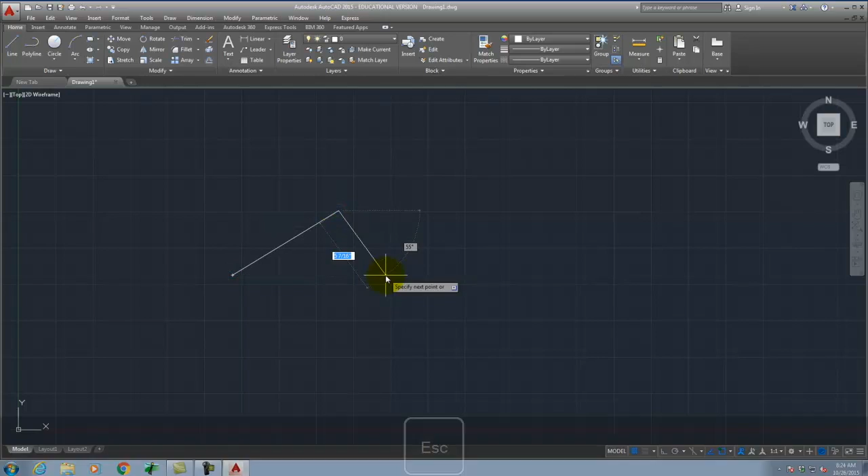As we come over here, let's see. The rest of this kind of doesn't matter. Now, I need to turn off the dynamic input, which I believe is this one. Hold on. Gotta love it, because these things always change and the icons change. So I have to find it. Is it this one? Oh, dynamic input is off by default. That's interesting. No, it's still on. Hold on a second. There it is.

So the tool that I wanted you to turn off is hidden now in AutoCAD 2015. So click on the little three lines at the very end here, and there's a check. There should be a check mark next to dynamic input. Go ahead and check the dynamic input button. And then it's this icon right here. It's the plus with the little rectangle below it. We're going to turn that off for a little while.

And I do this on purpose because I want you to learn something that dynamic input makes it easier to deal with. But I think it's important that you learn it first. So I'm going to make sure dynamic input is actually off, which it is now. And then with that off, we're going to start. Okay? So AutoCAD works just like Rhino in a mathematical system.

Okay, so you guys remember back to the early stages of algebra when you had to graph functions on a piece of paper, an XY grid, right? There was a slope, and you drew a line. You guys vaguely remember that a little bit? I know it's been a long time, right?

AutoCAD works very much the same way in that we have a coordinate system that's defined that we can use. You see down here, behind my head, there's a little icon for X and Y. There's also a green axis and a red axis, right? Those are indicative of points on a grid. This point right here, at the very bottom, is point 0,0. Everything going in this direction is positive X, and everything going in this direction is positive Y.

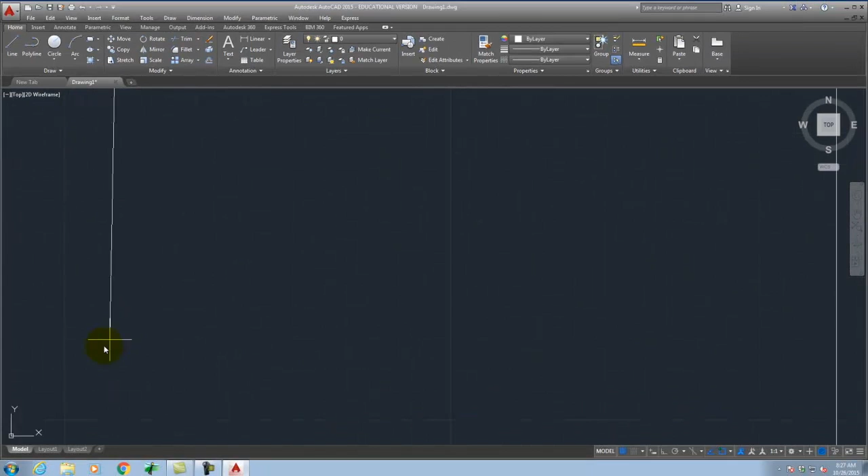And of course it goes off the page, right? So I'll hit Enter one more time, and then I have to zoom extents, which probably is available somewhere. I always type zoom. I'm going to go to View, Zoom, Extents. There we go. And so now I have a line that's right there that goes from 0,0 up to 0,24. If I continue with the Polyline tool, I'm going to start there.

Now, notice because I had to hit Enter an extra time, I wasn't active in the command anymore, so I had no active command. When I click on Polyline and I move my cursor over the top of the line, see how it gets that green box around it? That green box is an object snap, and it's going to make sure that when I click on this point, it's going to snap directly onto the end of that line.

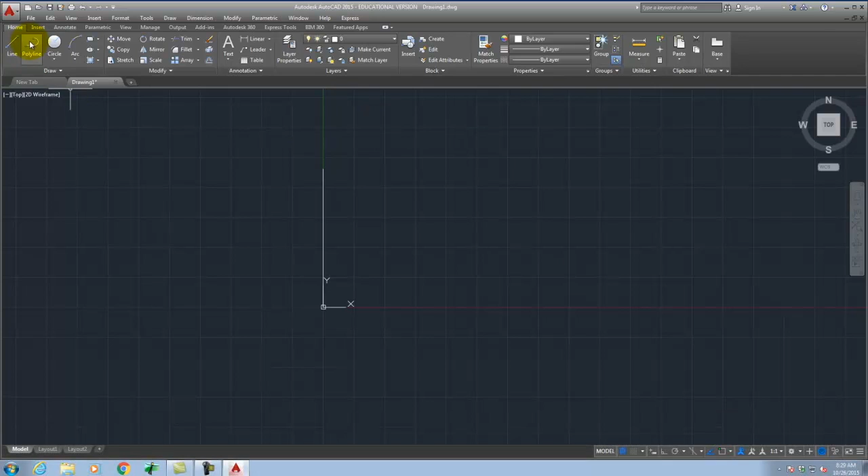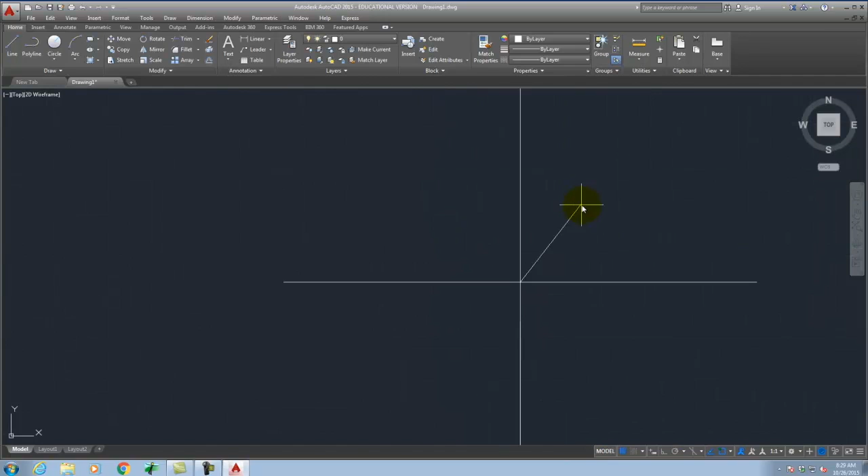If I didn't have the object snap on, let's turn that off for a second, and I try to get close, right? I don't get that little green dot, and even if I visually say, yeah, that looks really close, and I click, if I zoom in, you see that they're really not on top of each other. Even if I zoomed in more, they're still not on top of each other. Where if instead I have object snap on and I start on Polyline, the closer I get to it, the more I know that it's exactly on that point. Okay, so I'm going to zoom out.

And now I'm going to continue with these absolute coordinates. So now I want a line that goes over 12 feet. In absolute coordinates, it would be over 12 and then up 24. So I'd say 12 feet, 24 feet, and then Enter. And that draws a line from this point over to that point. Okay, so again, it's absolute coordinates.

So I just want to highlight this again. This is point 0,0 in space. I want to go up first to this point, and this point is going to be 0 because it's nothing in the X direction, and then 24 feet because it's up 24 feet. If I want to go to this point, it's going to be over 12 and then up 24. So this would be 12, 24 feet, right?

So that then created a line. Draw my lines here... and there, and there. Okay? So these are what are called absolute coordinates. Relative coordinates, on the other hand, are relative to the last point that you clicked.

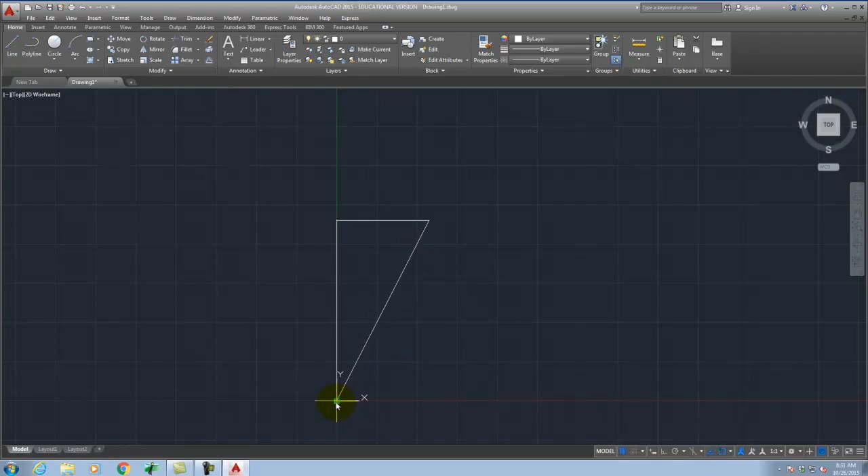Okay, so relative coordinates are relative to the last point that you created. So instead of being relative to point 0,0, down here at the origin, it's relative to the last point that I created. And this is a more common way of interacting with AutoCAD.

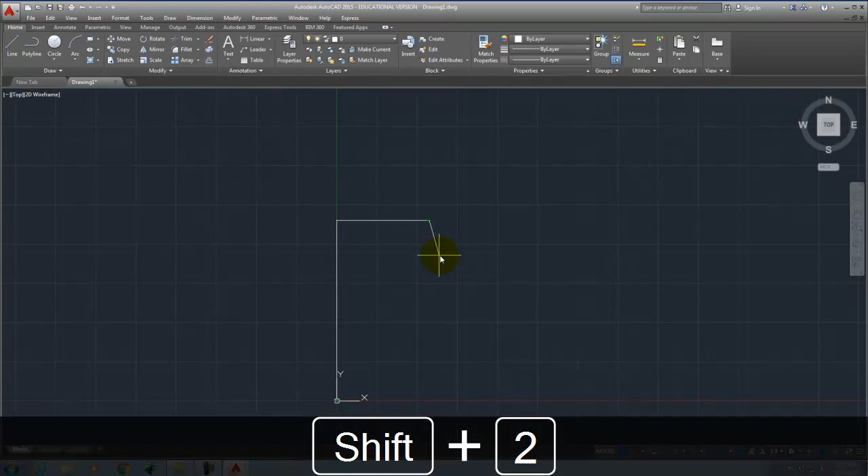So, for example, if I wanted to make a line that went down 6 feet, I would start the relative coordinate. I need to tell AutoCAD that it's relative, so I start with the @ sign, like an email address. Then I say the direction, the amount I want in the x direction, which would be 0 feet, and then the amount in the y direction, which would be -6 feet, because I want to go down 6 feet. I'll go ahead and hit enter, and that'll draw a line that's 6 feet long straight down.

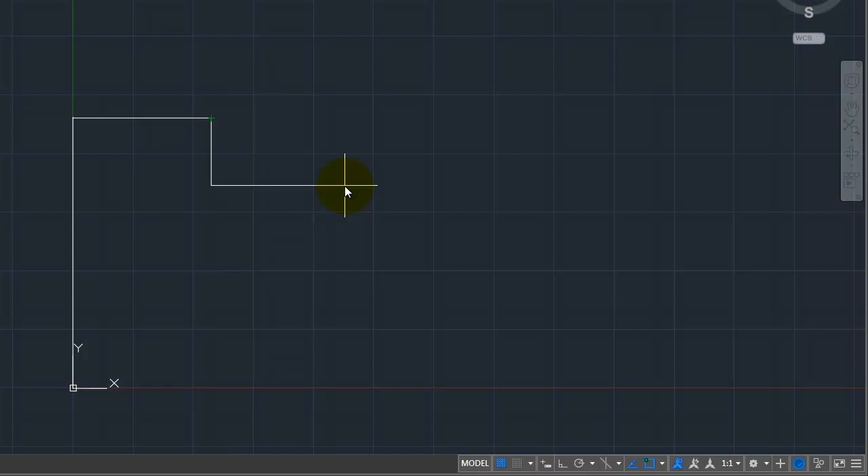Now, if I wanted to draw over, this would again be relative: 12 feet, positive x direction, comma, 0 feet in the y direction. And I get that point. So now I can continue, and I could say at 0, comma, negative 12 feet, because it's going down in the y direction. And there's my next point.

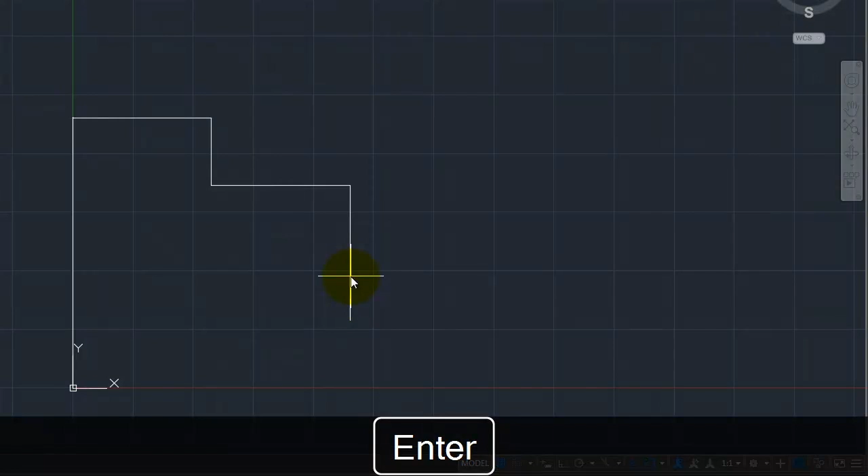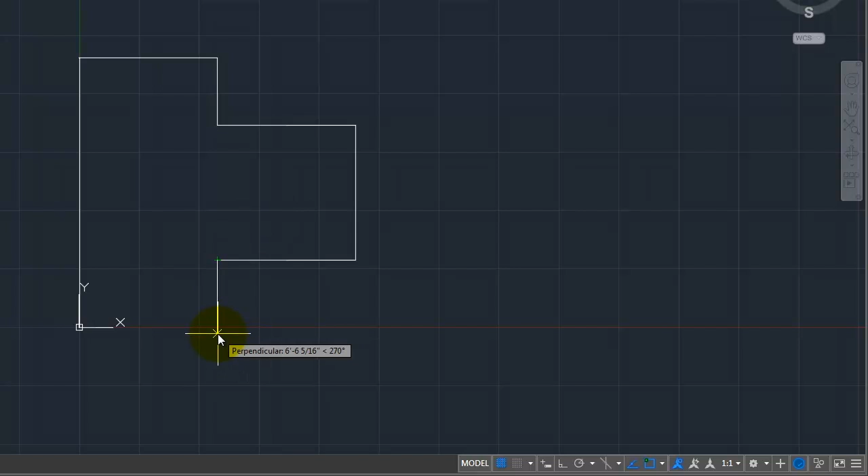Now I could switch back to absolute coordinates. So this one would be 12 feet, comma, 6 feet, and I get that point. So it's a little bit of math in your head to go back and forth between the two. And then this last one would be 12 feet, comma, 0 feet. There. And then I can finish off my shape.

Get this. Okay, so this absolute and relative coordinate thing is an important distinction, because there will come a point in time where you need to be able to type in a value. So I want to explain what the @ sign means, and what absolute and relative coordinates are.

The truth is that more likely you're going to be drawing with dynamic input on, so I'm going to go ahead and turn that icon back on. When I do that, I'm going to move over here to the right a little bit. You'll see that I get a crosshairs, but then I have some dynamic input that I can type in here. If I were to turn off dynamic input, I no longer have that bar that I can put things in. So we'll put that in.

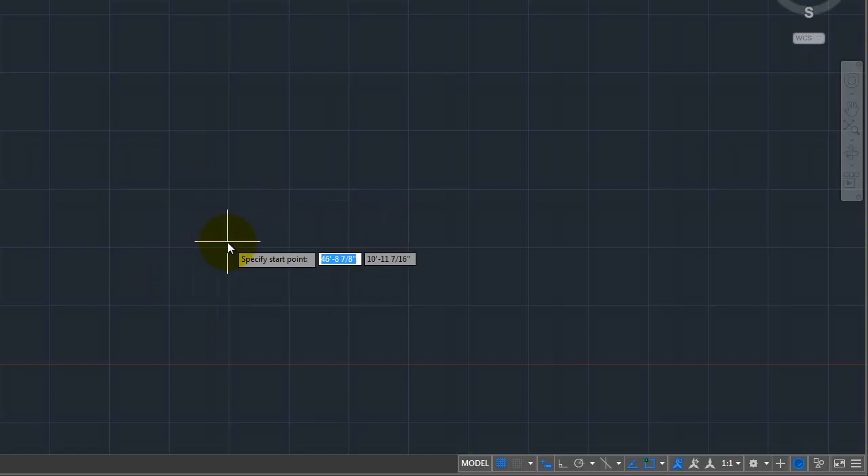Dynamic input - it says specify start point. I have 2 values. I could type in a value if I wanted to, or I can just click on the screen. And if I click on the screen, you see that now it's giving me a distance and an angle. So I have those 2 things to be able to control what the line looks like.

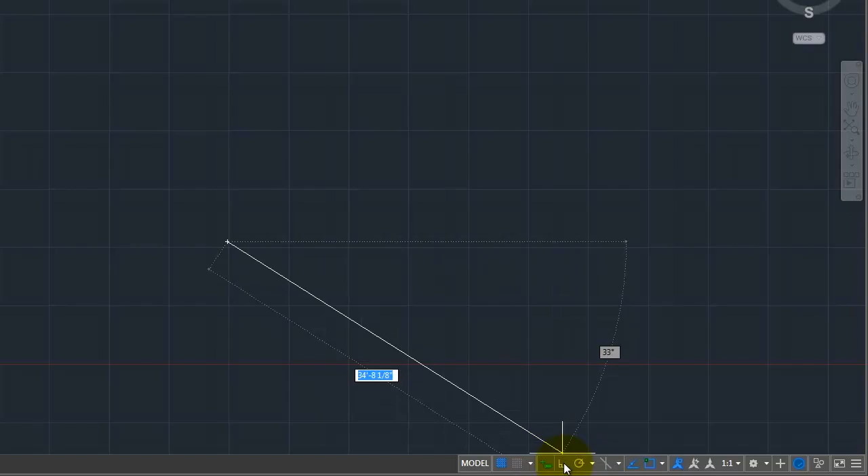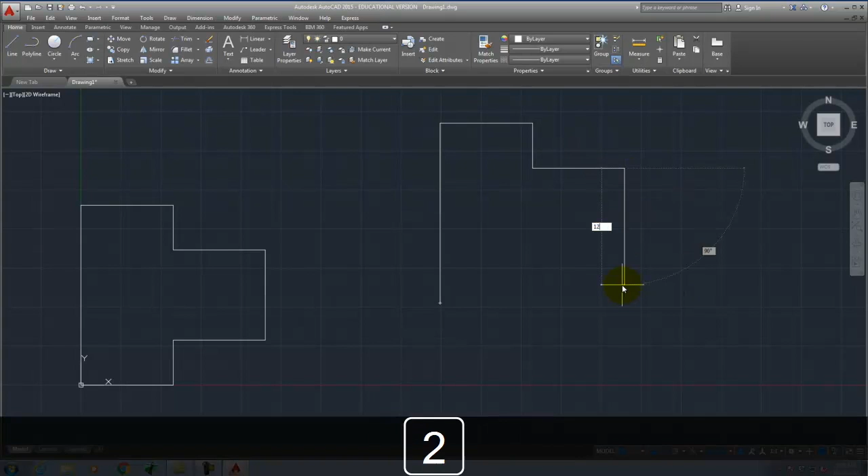So I'm going to go ahead and turn on my ortho, because I'm drawing straight lines, so I'm limited to just horizontal or just vertical. Now I can actually just specify the length of these lines. So I could say 24 feet, and it'll draw a line 24 feet. Now I can specify a length here, 12 feet. I can specify a length here, 6 feet. Notice I don't have to do positive and negative anymore. 12 feet, 12 feet, 12 feet, 6 feet, and I can come back to the start.

So when I'm done, I'll hit enter. Notice that that was a whole lot faster to just type in the values and have the general direction. But chances are you're going to want dynamic input, and you're going to learn to draw that way. I just like to illustrate the point of the coordinate system, because there will come a point in time where the coordinates mean something. But for now, we're going to go ahead and leave dynamic input on.

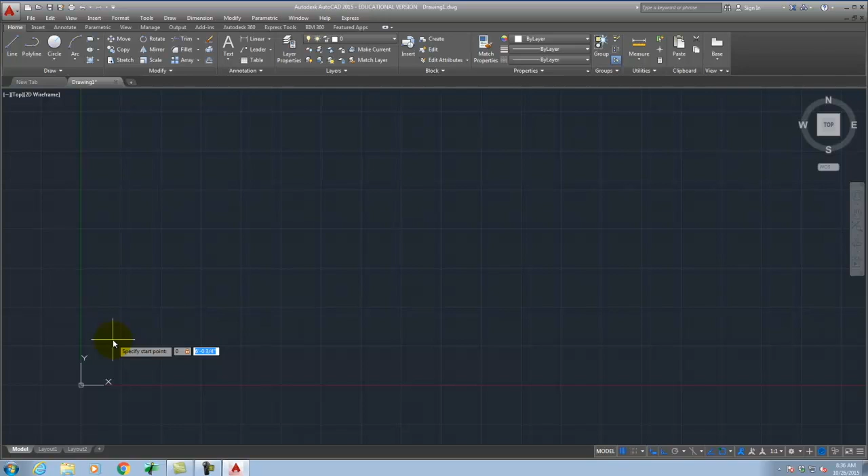And so you can go ahead and draw your shapes. I'll do it one more time for illustration. We'll start again with the polyline, and this time I'm going to specify a start point by typing it in. I'll type 0, then comma, then 0. Notice when I type 0, it's in the first box, and when I hit comma or tab, it moves to the second box. I'll type in 0, then hit enter. There it is at 0,0.

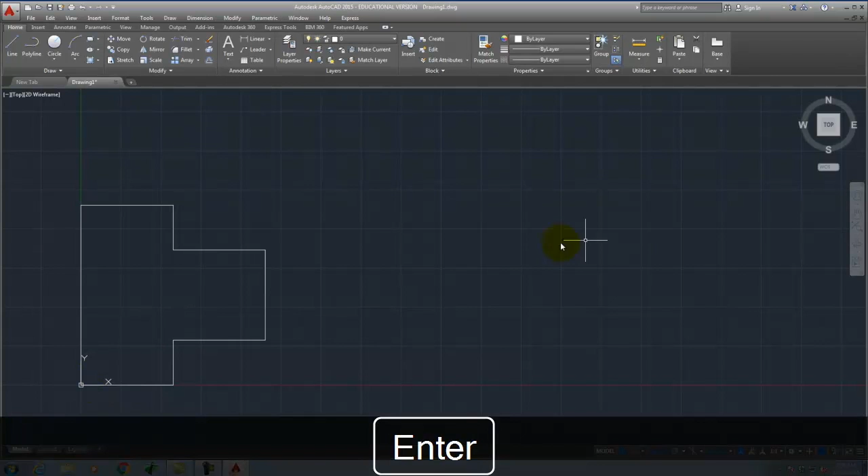Now I'll type in the values: 24 feet, 12 feet, 6 feet, 12 feet, 12 feet, 12 feet, 6 feet, and then I just clicked at the end there. I could type 12 feet again. And so now I end up with the basics of the floor plan that's on the back of this sheet. This is an extraordinarily simplified floor plan—it's just giving you something to work on when you draw.

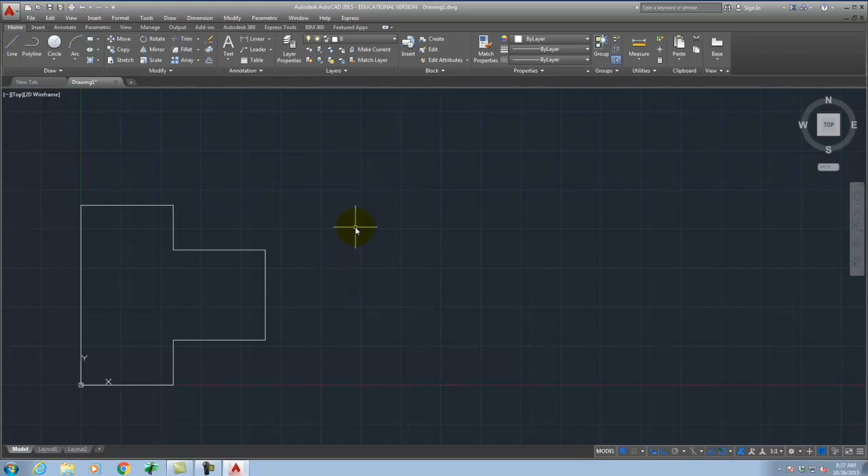So I now have a polyline that goes all the way around the outside of my object. I'd like to turn this into a set of walls, and I'm going to do that using the offset command. What the offset command does is take a line and make a copy of that line that's a certain distance from the line I started with.

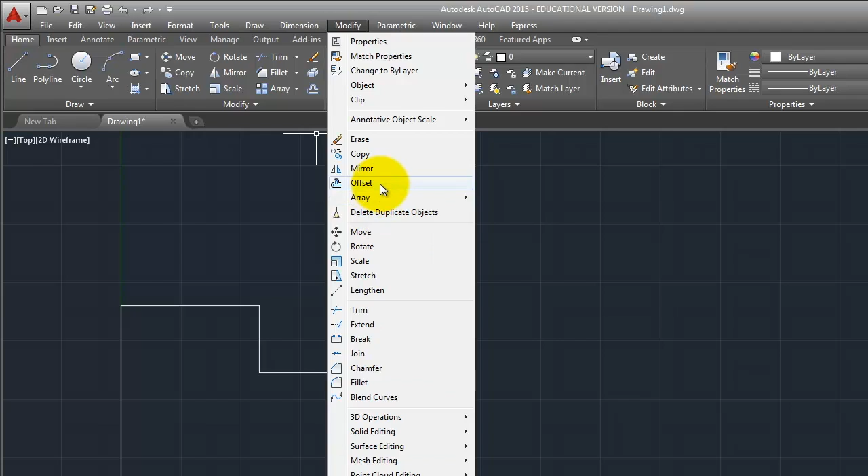It's available up here in the Modify toolbars—it's the lowest one on the right corner, called Offset. I can also go to Modify and then Offset, if I can find it... there it is, Modify Offset. Or I can type Offset. Three different ways of initiating that Offset command.

So if we look at my dynamic input or the command line, you can see it says offset, specify offset distance, or through, erase, or layer. We're going to go ahead and specify the offset distance as being 6 inches. Now, there's some debate—if we were in a technical construction class, walls aren't exactly 6 inches thick, but for what we're doing, 6 inches is fine. So I type in 6 followed by the quotation mark for 6 inches, and hit enter.

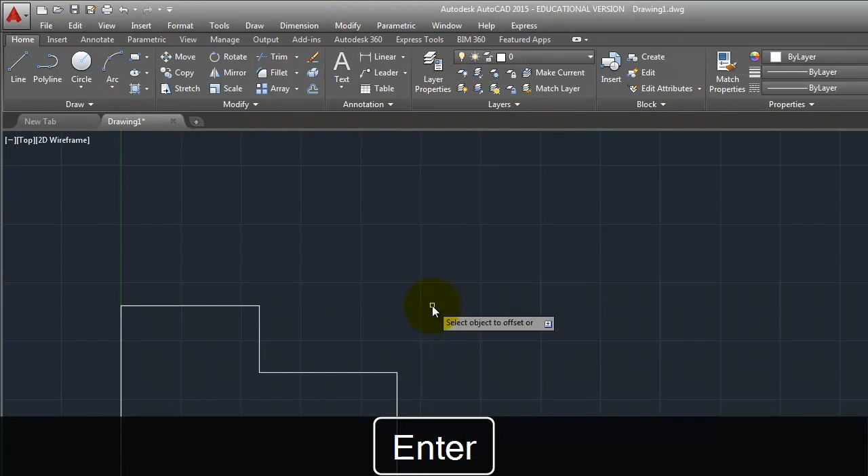Then it says select object to offset. So I want to select my object, which you notice when I mouse over it, it highlights and glows a little bit—that's so I know which objects I'm clicking on. I'll go ahead and click on it, and then it's going to say specify point on side to offset.

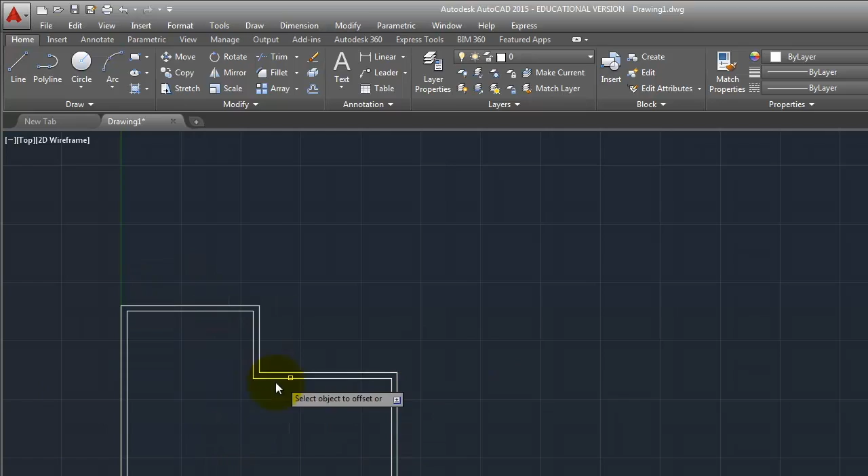So do I want the offset to be on the inside of my line, or on the outside of my line? I'm going to click either on the inside or the outside. In this case, I want it on the inside, so I'll click on the inside here. And now I have 2 lines that go around this shape—so that was a really easy way of creating the double line for the walls.

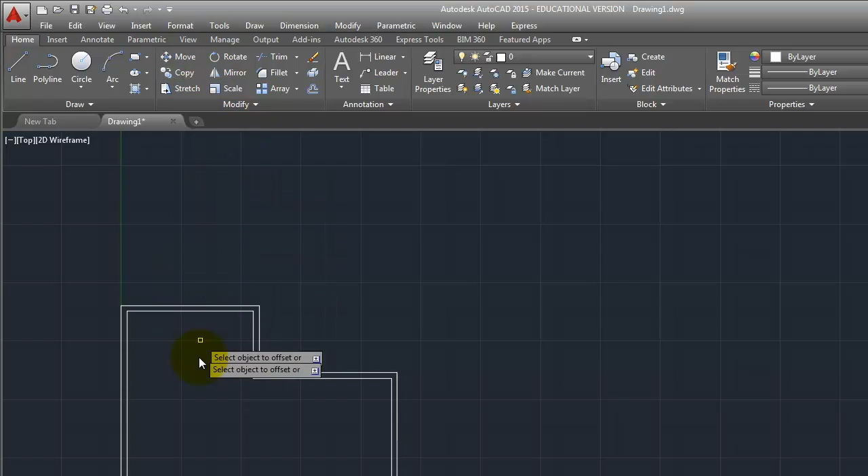Next thing is I need to start adding the doors and windows of the building, and this is where you start to just practice. So let's look—I'm going to add the door in the center at the top here. I'm going to go back to Polyline, and zoom in on the top here. Now I know that my door, if we look at the back here, is at the center—it's a 3-foot door in the center. So I need to find the center of these 2 lines.

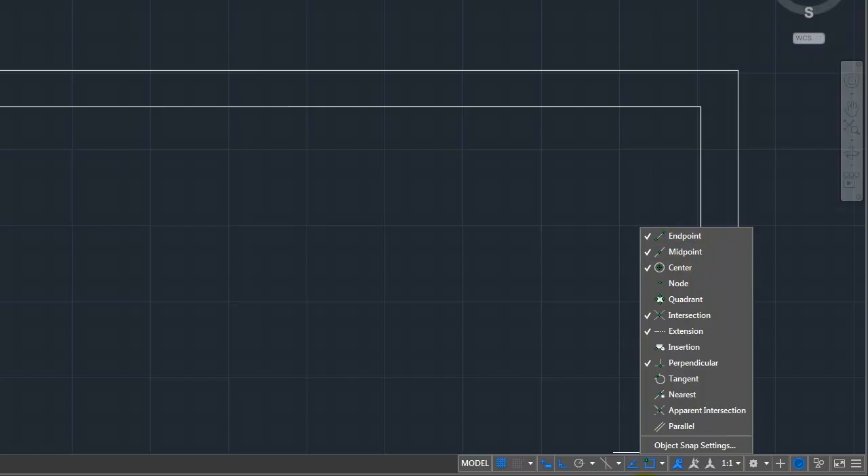Right now I can't really find the center—I'd have to be guessing, or measure, or something. Instead, I'm going to come down here to my object snap, click on the little triangle next to it, and turn on midpoint snap. What midpoint snap does is say, tell me where the middle of the line is. So it gives me a little triangle and says midpoint. Now I'll click where it says midpoint, click again, and I'm done, so I'll hit enter on the keyboard. Now I have a line that's exactly halfway across this set of walls.

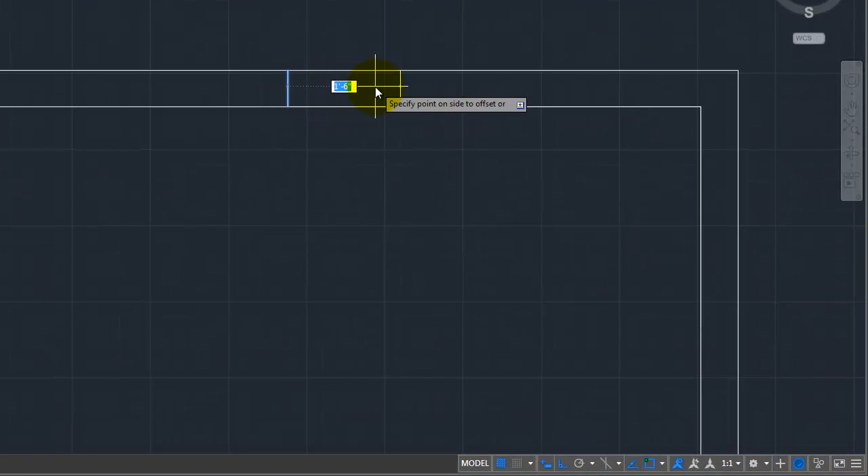I also know that my door is 3 feet, so let me use that offset command again. I'll click on offset, and it says specify offset distance. What's half of 3 feet? 18 inches, or 1 foot 6, depending on how you want to do it. So I'll type in 18 inches. Now it says select object to offset—there's that little line, and I'll offset this way, and then continue and offset that way.

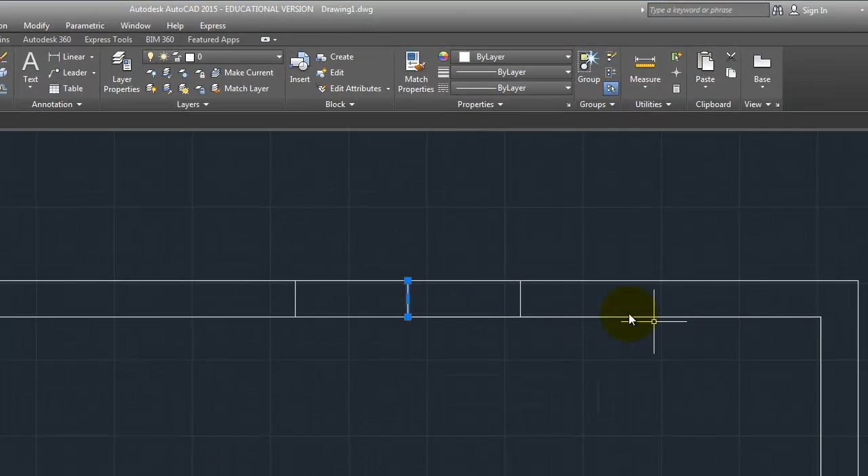So now I'm done, I'll hit enter. And so I have one side of the door, and I have the other side of the door over here. I also have a line here in the center that I don't need anymore, so I can click on it, press the delete key on the keyboard, and that goes away.

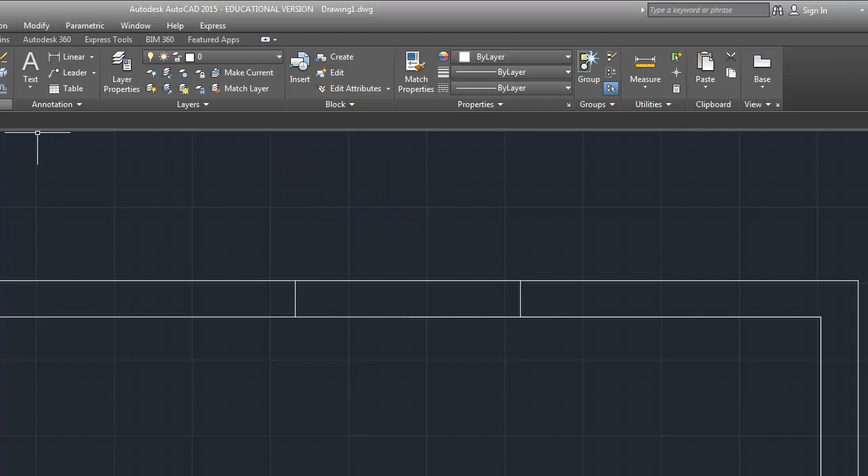Okay, so I've established this as a door, but I need to get rid of this line and that line because the door is open. So I'm going to use a command that's called Trim, which is available right here in my Modify tools under Trim. It's also under Modify and then Trim. Or again, you can type in Trim and then hit Enter. Okay?

So then the Trim command says Select Objects or Select All. If I select all, it's the fastest way of selecting everything, but I don't need to select all the objects. I only need to select the objects that I'm directly working on. So I could, for example, select them individually, there, there, there, and there. Or I could draw a box through them.

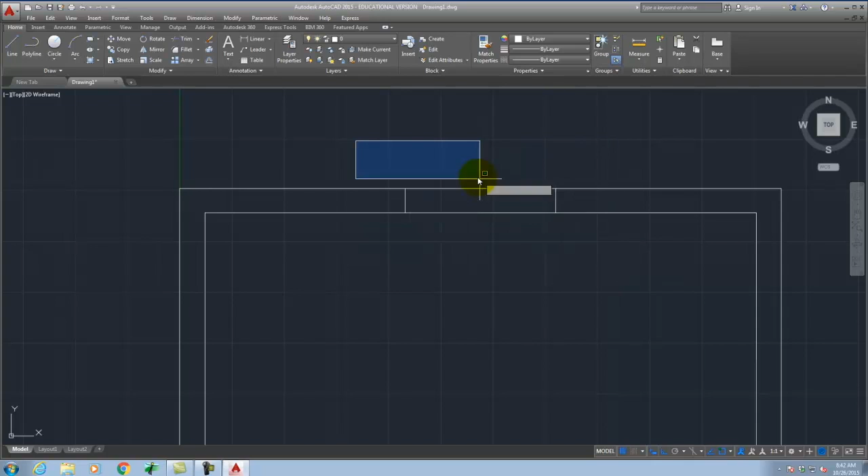And so this brings up a good opportunity to explain how AutoCAD selections work. I have two different ways of selecting in AutoCAD, and AutoCAD has made it easy to see which selection method you're using. If I start anywhere on the left side and I draw a box, I get a blue rectangle, and anything completely contained within the blue rectangle will be selected. So if I drag it over these two lines, those two lines will be selected, but this line and this line are not selected.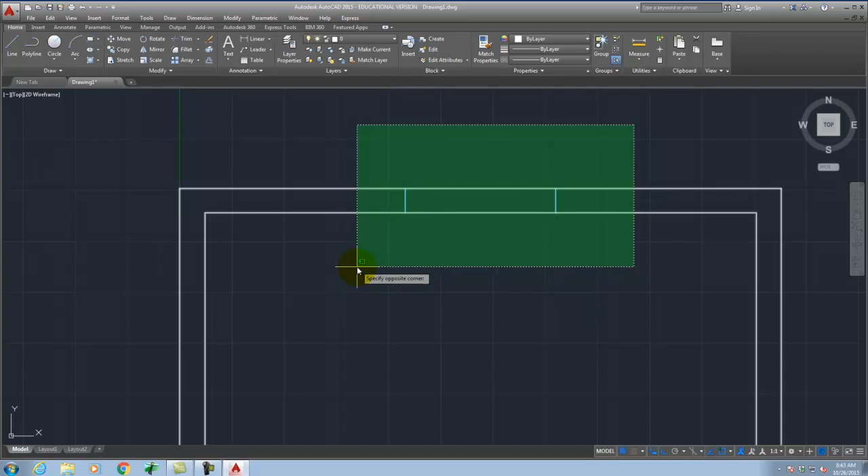If I start anywhere on the right side and I drag a box from the right, my selection is now green instead of blue. That means that anything this box touches will be selected. So in this case, from right to left, I get all of the lines, the horizontal lines and the vertical lines. So there's two different ways of selecting, and it takes some practice to get used to which way is the right way. So I have those selected. I'll go ahead and hit Enter.

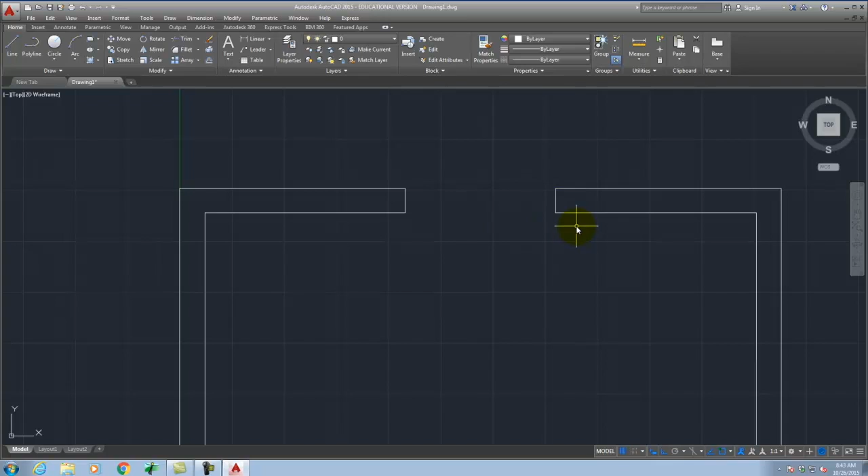Now it says Select Object to Trim. So I'm going to click right there, and it gives you this handy little red X that says this is going to go away. So I'll click there, and I'll click there. When I'm done, I'll hit Enter. And now we can see that I have this door opening created. All right? I'll continue on and draw a little window.

So I have a window that's 1'6" from this corner, 1 foot from here. So I'm going to go back to my Polyline tool, and I'm going to move the mouse to this corner, and I get a little perpendicular snap icon there. As I drag the mouse this way, see how I get a little green plus sign, and then a dotted line extending out this direction? What that's doing is allowing me to type in a value from this point.

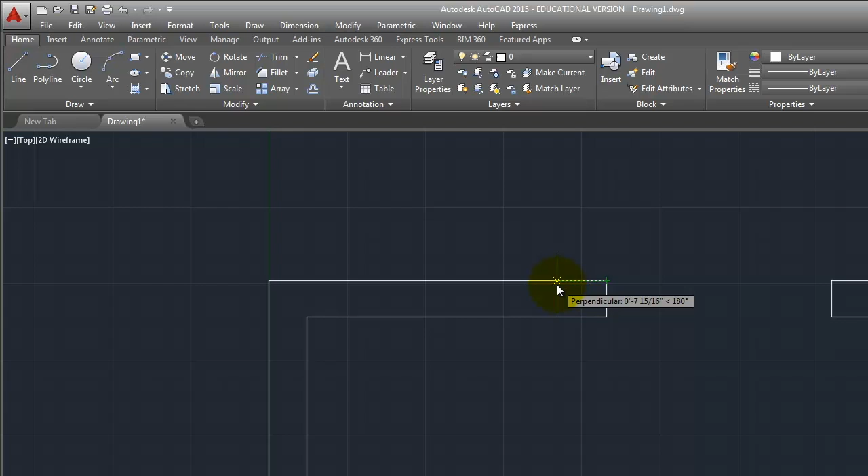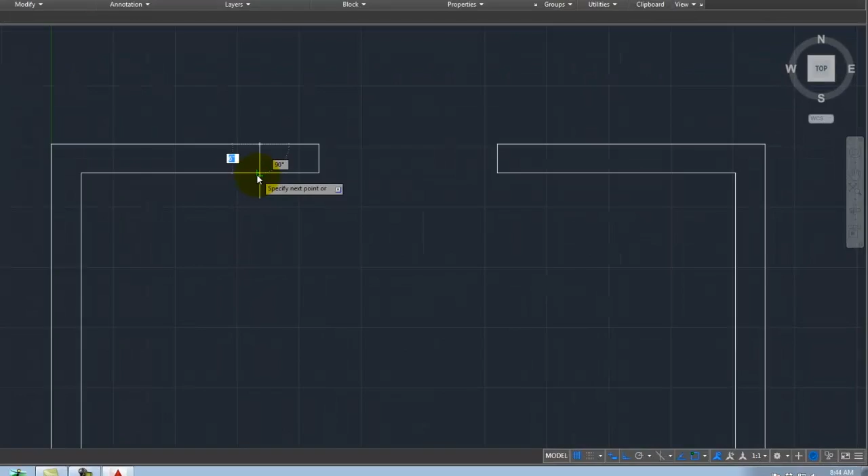So I know I want to be over 1 foot, so I'll type 1 foot and then Enter. And my starting point for this line then becomes 1 foot over from this point. In the world of Rhino, it's called smart tracking. In AutoCAD, I forget exactly what they call it. And so then I'll draw my line to here, and I'll hit Enter. Now I'm also going to do another line at 1'6" from this corner, so I'm going to repeat this again.

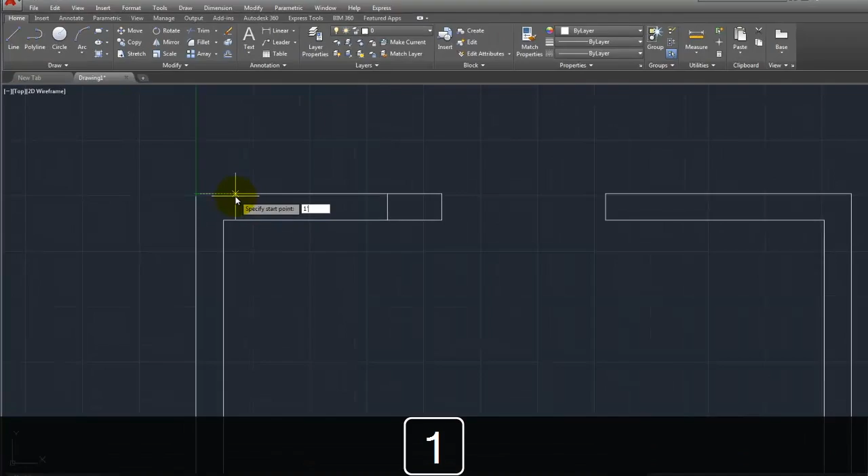I'm going to start with the polyline. I'm going to move my mouse over that corner, and I didn't click anything, I just dragged the mouse over, and I get that little green plus sign and a dotted line. And then I'm going to type in 1'6", so 1'6" with a quotation mark, and hit Enter. And now I have a line that's 1'6" from that corner. I'll draw it to there, and I'll hit Enter. So now I have this first window that's open.

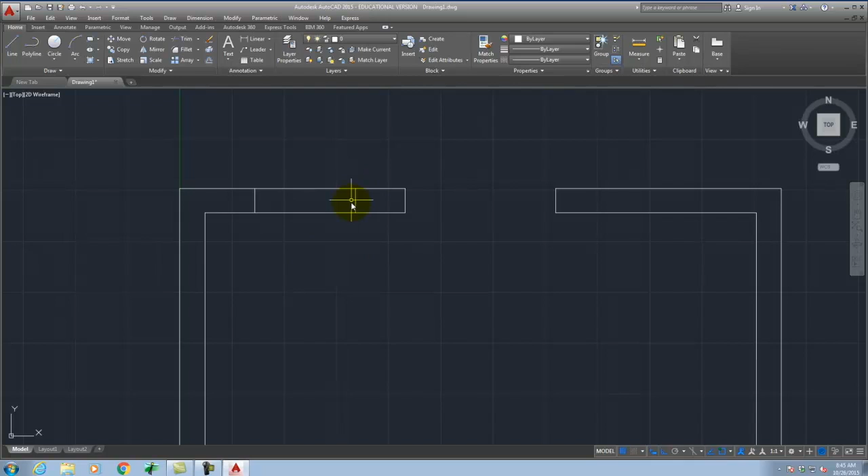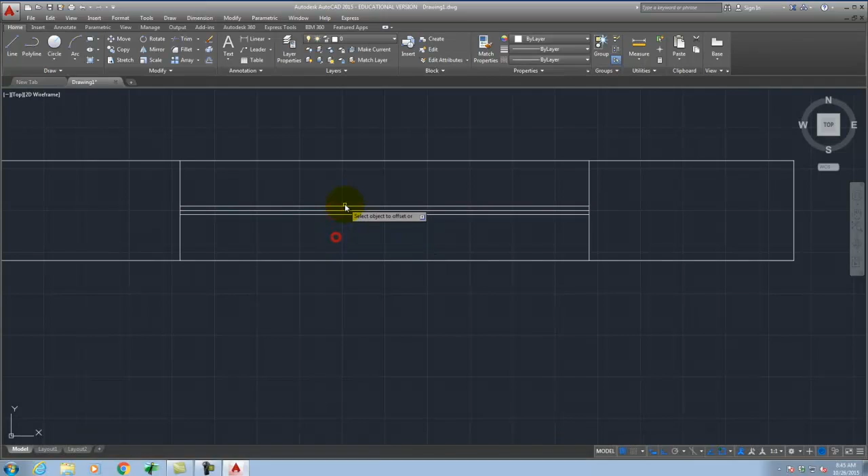And I can draw a polyline from the center here, and we can designate that as a window. I could also get technical, and I could offset this piece of glass by maybe 1/4 of an inch and have one on the inside, one on the outside, and then I could get rid of the center just to add a little bit more detail to it. You don't have to. It depends on your level of AutoCAD.

Okay? So I have this window here. I need to have the same window on this side over here. So I can go ahead once again with the Polyline tool, and I can draw this. So we can go over by 1 foot.

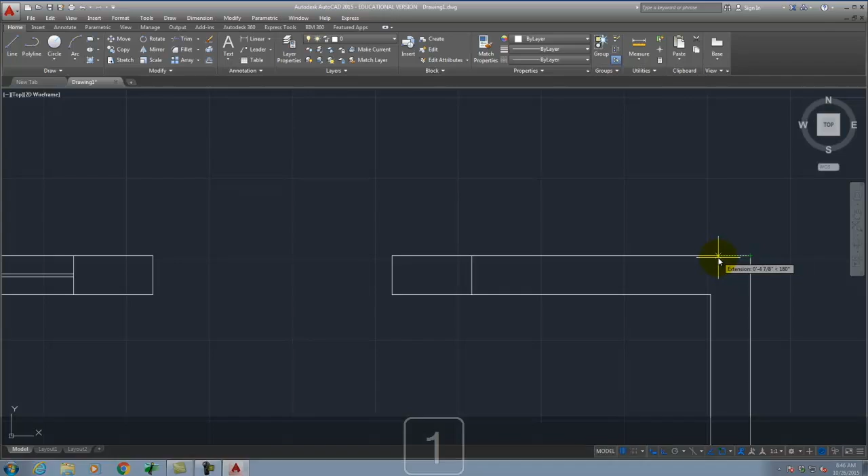And then we can go over by 1 foot 6 inches and down. Okay? And then I could draw the lines again. Now, for me, that would take too long, and instead, what I would do is I would select, and again, I'm going to select from the left to the right to select everything contained within my object, not everything.

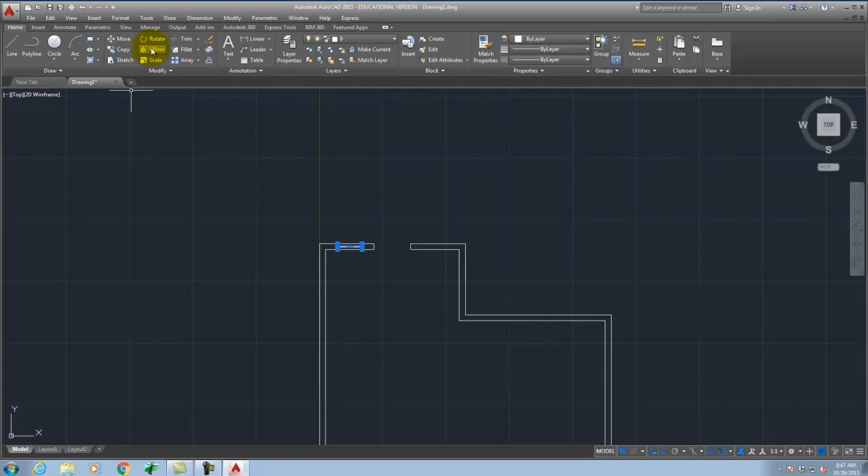There. And I'm going to use the mirror tool. So up here, there's a tool called mirror. And what mirror does is it says, take 1/2 and reflect it across a line. So I'll click on mirror, and it's going to say, specify first point of mirror line. So because I want this window to show up right here, I need a mirror line that goes right through the center of this door.

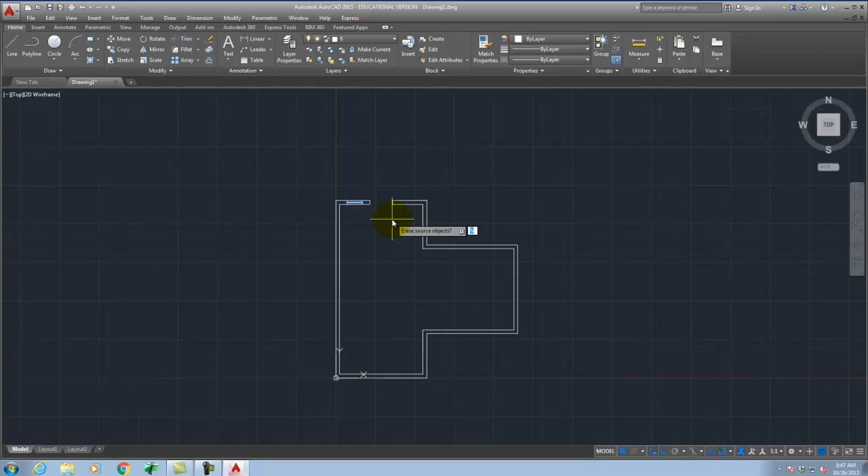But I can't click on the center of this door anymore, but I can click on the center down here. So I'll click on the center down here, and I'll draw a line, and it's represented by that dashed line. And when I click, it's going to ask me, do I erase the source or do I keep the source? By default, it's no. No, I want to keep the source. So it already says N for no. And I'll hit Enter. And now I have a copy of this window over here. So it's a much faster way of drawing this window in.

Okay? I also, according to the plan on the back, have a window in this wall that's the same dimensions, and a window in this wall that are the same dimensions. So instead of just mirroring straight, I'm going to take this object, and I'm going to mirror it. Let me click on mirror. But I'm going to mirror it across a 45-degree line. So you remember back in 130 when you were reflecting objects around that 45-degree line? I'm doing the same thing here.

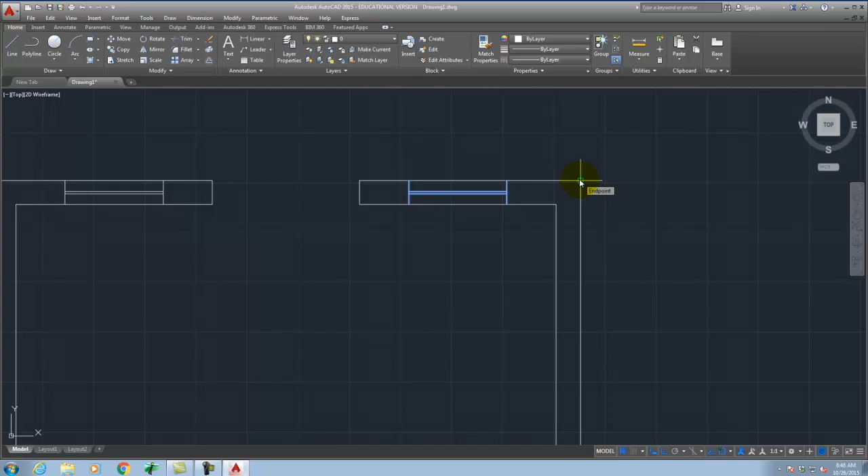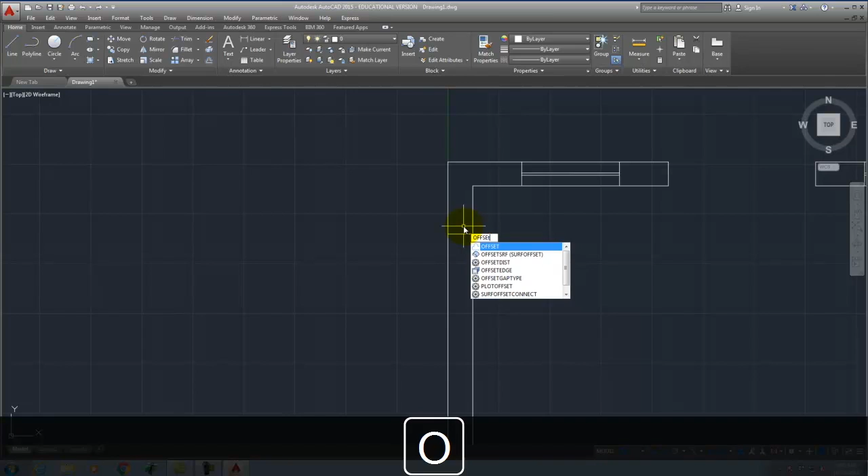I'm going to mirror my object right there at 45 degrees. And we'll say no. And it's going to bend this object down over to here. So it's a much faster way of drawing it than to actually draw it. But of course, if that didn't sit well with you, I can draw it the same way. So I could go 1 foot 6 inches. And then I could offset. This was 2 feet.

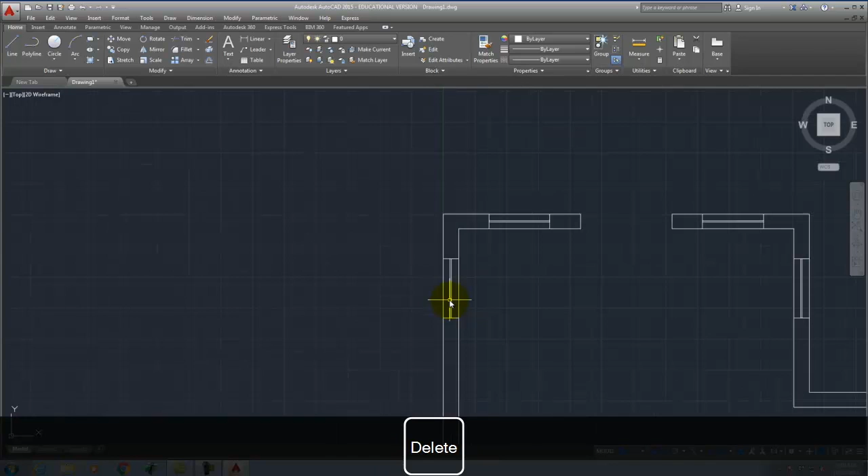That line there. And then we could come back and I could draw the line in the center. And then I could offset by 1/4 inch. I could do there. And there. And then I could delete it. So there's nothing wrong with drawing it again. It just takes more steps, a little bit more work, rather than using the mirror. Okay? So there's more to do. There's more lines to draw, etc.

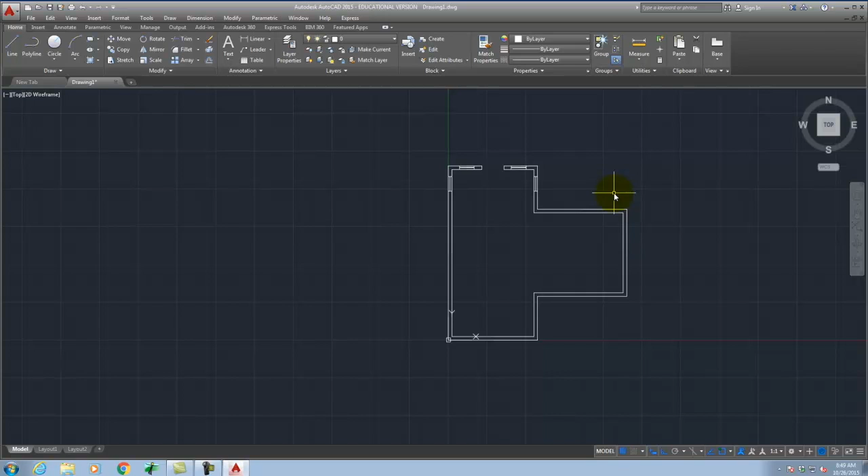I'm going to turn you loose now to practice with this. Those of you that feel comfortable in AutoCAD, if this is boring for you, go ahead and change it. You could chamfer a corner. There's lots of different things to do. Oh, the one other thing that can be useful is to join objects together. So see how that line is separate from this line and is separate from this line?

If I select all of these lines and then type join or go to, I think it's under modify join, those objects will now become one object, which can be useful. Okay? So I can select these as well, and then I can go up to join, modify join, or type join, and now those are one object instead of separate objects. Optional if you want to do it.

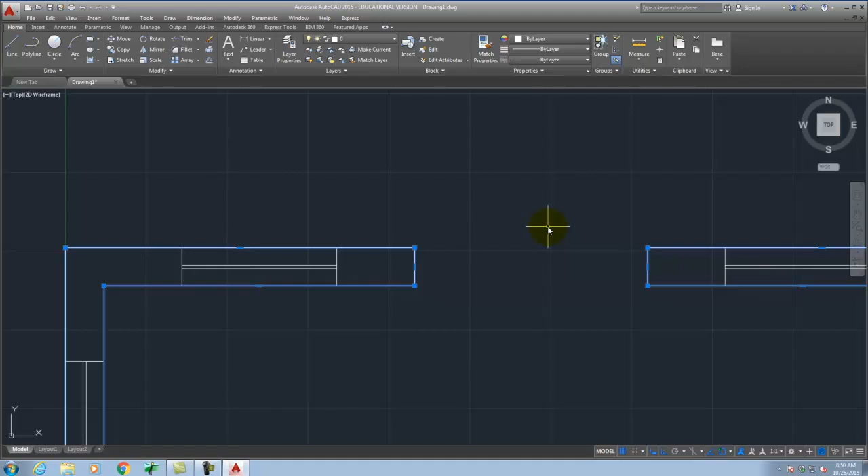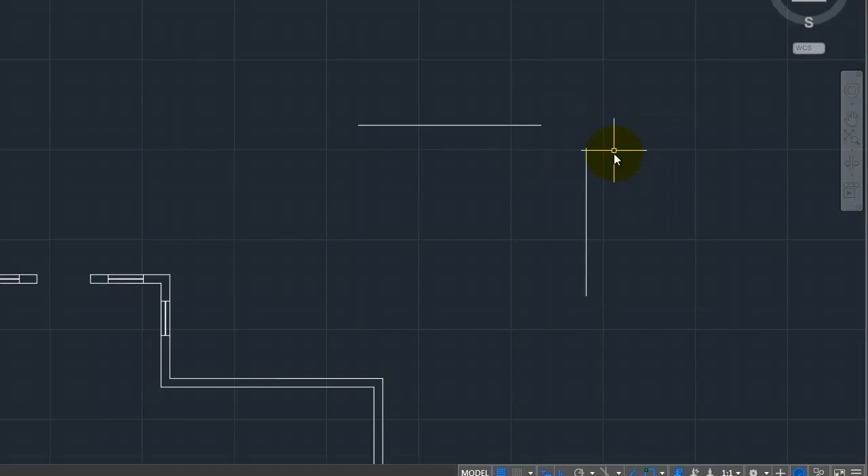Okay? So I suggest other commands like extend, fillet, chamfer, mirror, rotate. And so I'll show you a few of those just so that you know what they are. A fillet takes two lines. I'm going to move over here to the side so you can see this a little better. And a fillet puts a curve between the two lines. So if I type fillet, or I click on the fillet tool right here, the first thing it's going to ask me is to select the first object, or I have some options. And you can see the options listed here: undo, polyline, radius, trim, or multiple.

I'm going to type R for radius. The other thing I can do with this dynamic input on is, you see here it says select first object or, and there's this little icon that's hard to see on the screen. It's a key for down arrow. So if I press the down arrow on the keyboard, I'll get a little shortcut of what my options are. And I can then use the down and up arrows to select radius and then hit enter.

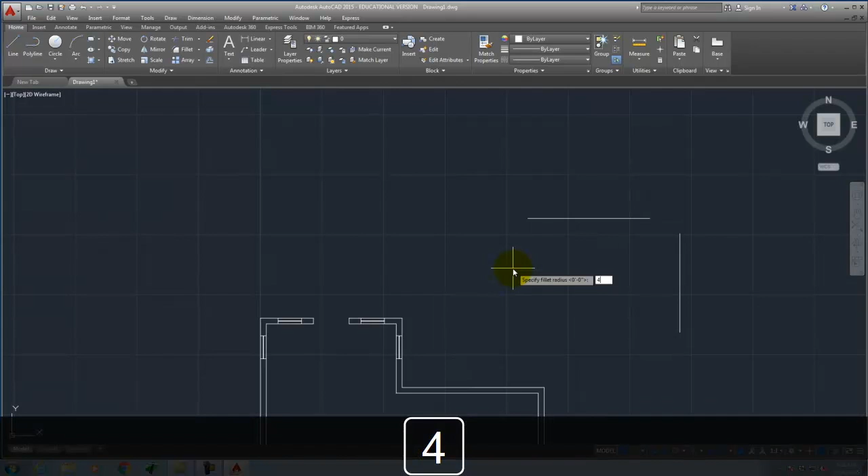Okay? Or I can type R for radius. There's lots of ways of doing this. And so let's say I want a radius of 4 feet. When I select the first object here, and I select the second object, you see that it takes the two objects and it connects them together with an arc. Okay, that's a fillet.

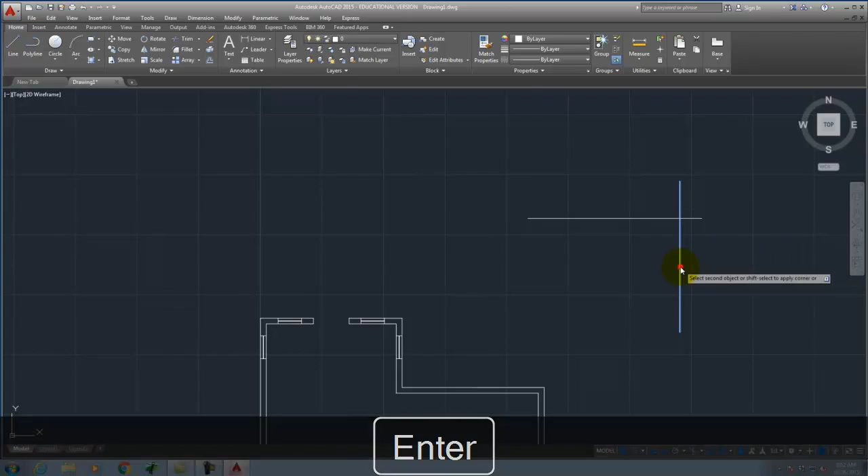So once again, right, let me get rid of this. I have two lines. The lines can even go past one another. It doesn't matter. And if I click on fillet, I'll type R for radius, and let's say 2 feet this time. If I select the first line and then the second line, I'll get an arc between the two.

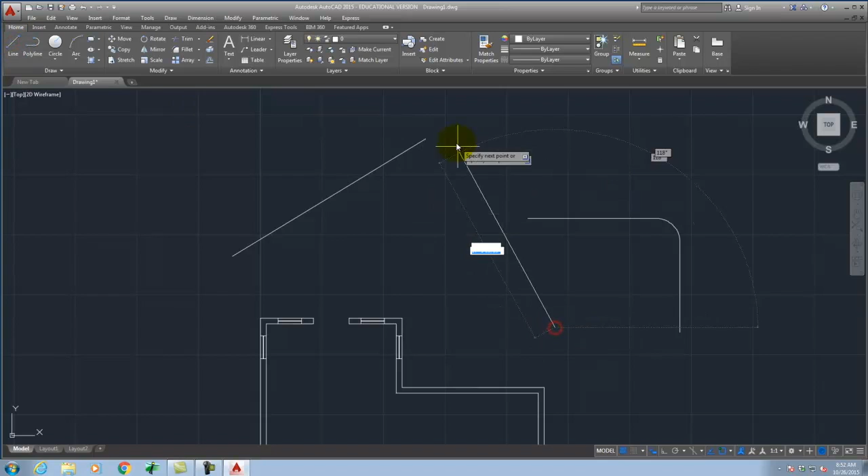Okay? So one of the tricks that I use very frequently when I'm drawing is, let's say that I have, let me turn off, say that I have two lines in space, something like that, and they didn't quite come together. If I want them to come together at a 90-degree angle, I'll do a fillet with a radius of 0, which basically says a 90-degree angle, and those two will come together as a 90-degree angle, right?

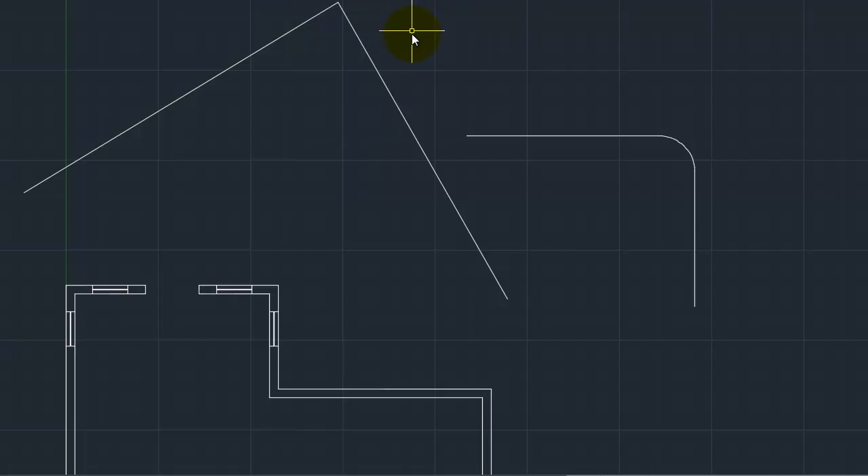It's just a shortcut way of connecting lines together. I use that a lot when I'm drawing. But again, doesn't matter. So that's the fillet command. The chamfer command is essentially the same thing as a fillet, except that it creates an angle that connects the two, right? And it's not available under the defaults that are set here. We'd have to go to modify and then chamfer. It's less common. It's right here, right?

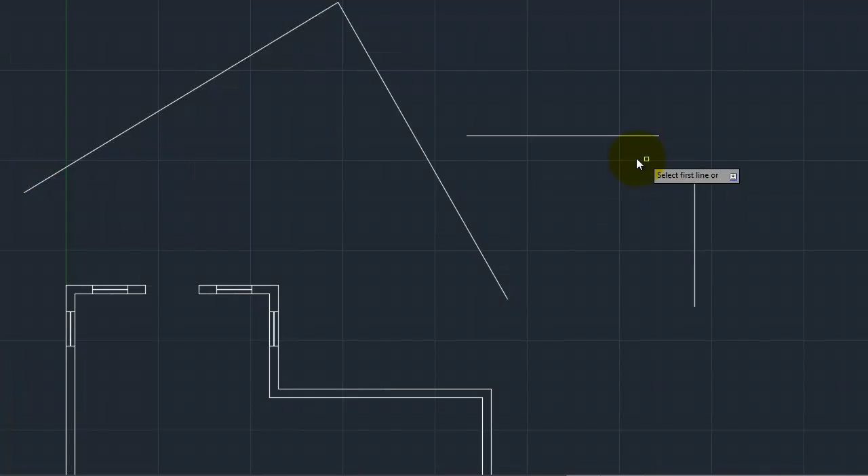And it's going to say select first line, or again I have options, right? So this time instead of radius, it's going to be distance. So I'll type distance, and then it's going to say what's the first distance? I don't know, it's 1 foot. Second distance, we'll do 1 foot again. And now if I took this and I took this, it's going to put them together with a little angle.

Right? I could do it for these lines. So I can click on this one, and then I can click on this one, and it'll again angle the two together. Okay? So that's chamfer. We already did mirror. We already did fillet. Extend. I don't know how common this will be. Extend would be if I had a line and I had some lines that were pointing toward it. Say something like that. And I wanted these lines to go to where they hit this line.

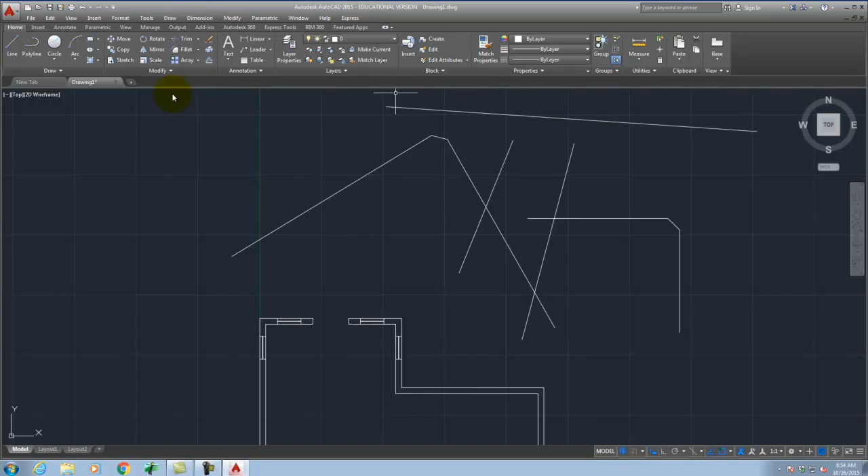I can type extend or go to modify extend. And it's going to say select objects or select all. So we'll select those objects. I'll hit enter. Then it says select object to extend. Right? You see when I put the mouse over it, it extends the object to meet the other object. Sometimes that's useful. Okay? And the last one that I'll show you is rotate.

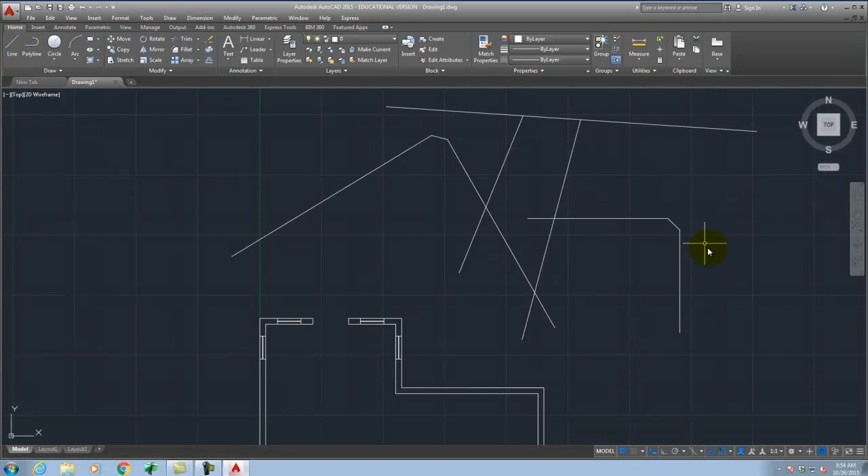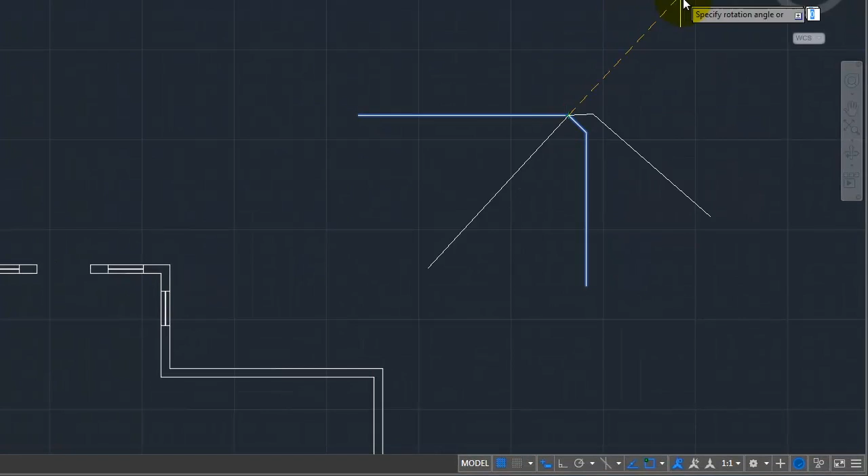Right? It's available right here under rotate. When I click on rotate, it'll say select objects. I'll select the objects and hit enter. Right? Then it's going to say specify base point. This is the point around which you want to rotate. So maybe there. Right? And then I can specify a rotation angle, or I could click on the screen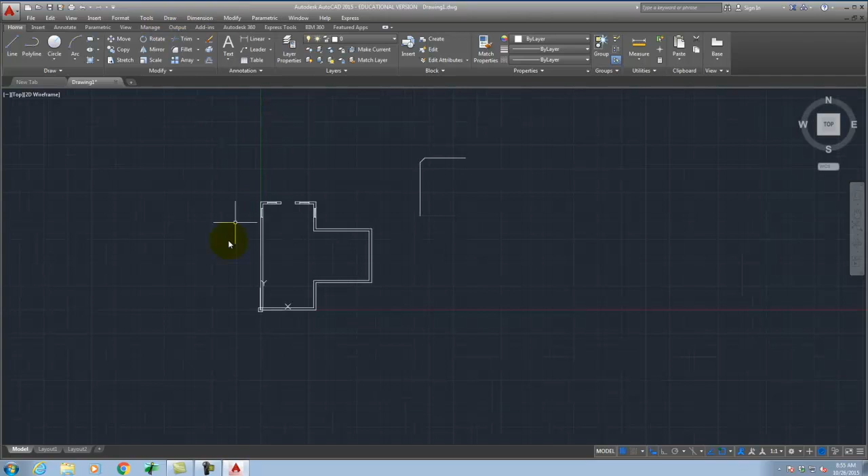where I want it to rotate. So if I want it to be there, for example, I can go ahead and click, and now I've rotated the object. Okay? So you may find that that's useful as well. Okay? So when you're all done for today, right, you're going to go to this little printer icon, and you're going to specify under the printer or plotter, publish to web.

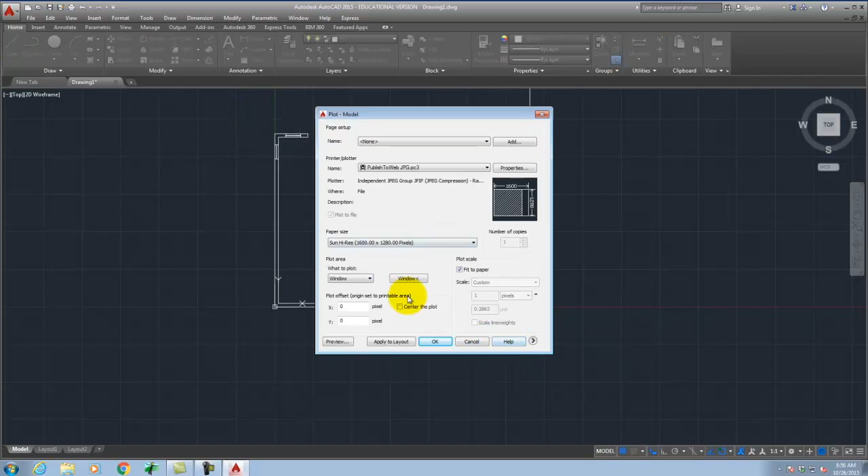Right here, publish to web JPEG. Right? And you can just say use default paper size. Right? Plot area is either display or window. It's up to you. Right? Display will plot what we see. Window allows us to specify on the screen what we want to plot. Right? When I go ahead and say OK, it will bring up a place for me to save it.

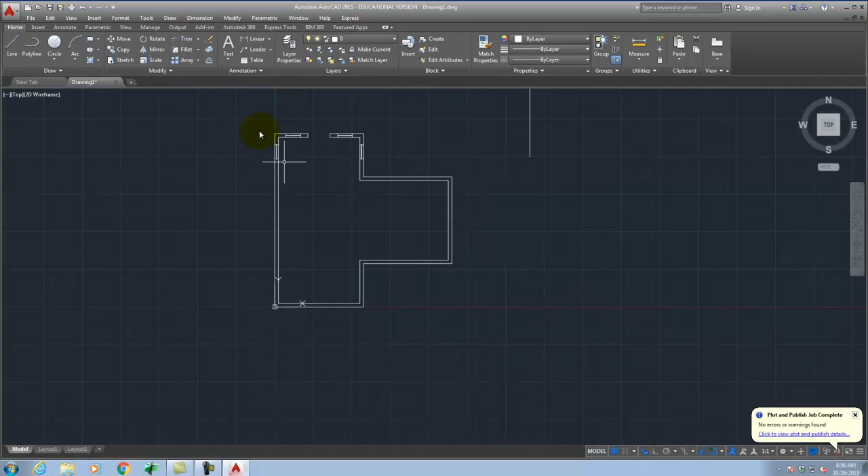You'll go to your flash drive. And I'll go ahead and click on Save. And it'll save a JPEG image. That's what you'll post as part of it today. I did not put on here, but you do not need to comment on this exercise. Okay? So you're off the hook for any comments.

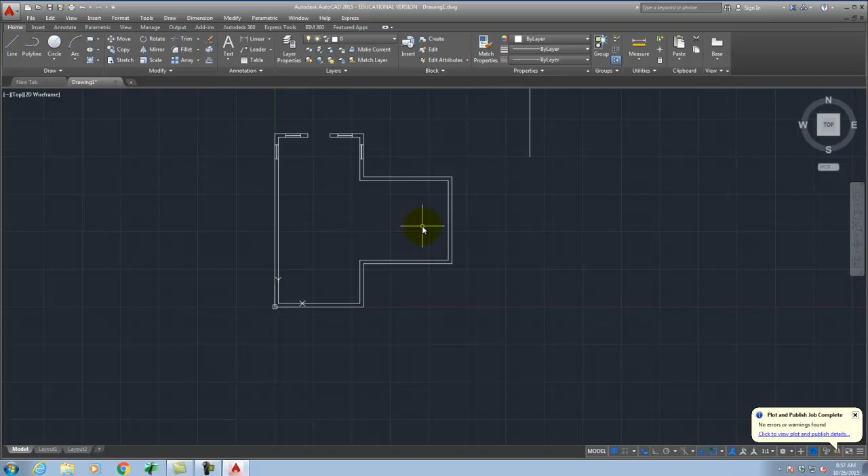Are there any questions? All right. I know AutoCAD's a lot to take in. We're going to take it in small steps with a lot of practice. So spend today getting familiar with it. If you already are familiar with it or you've already taken an AutoCAD class, this is completely review for you and you'll breeze right through it. But it's still important for everybody to get on the same page. Okay?